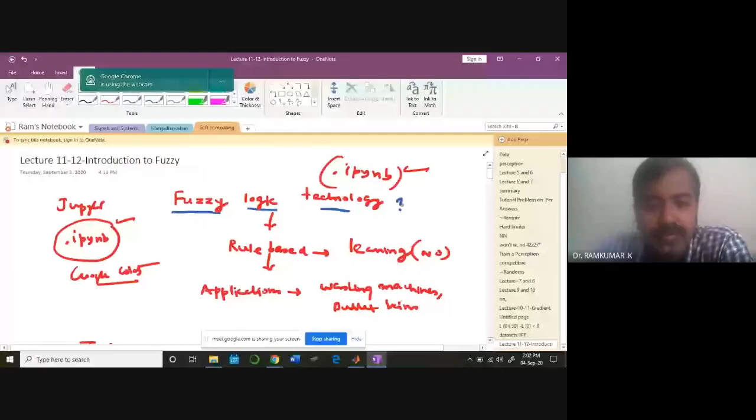So we started off with fuzzy logic in the last class. Okay. So what is your general understanding of fuzzy logic? Anyone? Arun Balaji, your general idea of fuzzy logic? Abhyashri, what have you understood by the term fuzzy logic? The last class I introduced you. Any idea?

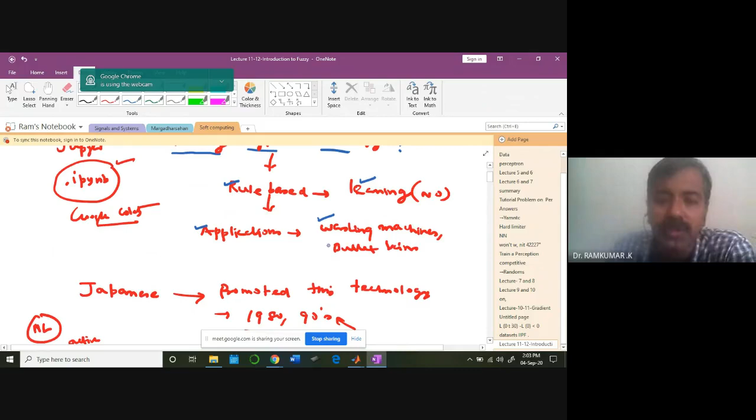So I initially mentioned it's basically a rule-based system, okay? And there is no scope for much learning there. Okay? And the applications range from consumer products like washing machines to bullet trains, we have a lot of applications. And as I already told you, the Japanese promoted this technology strongly.

Okay, any reason why the Japanese are interested in this technology? Any fair guess? Why are they so much interested in this technology? Any idea? Quite interesting to read that. Any fair guess? Why are the Japanese interested? Krishna?

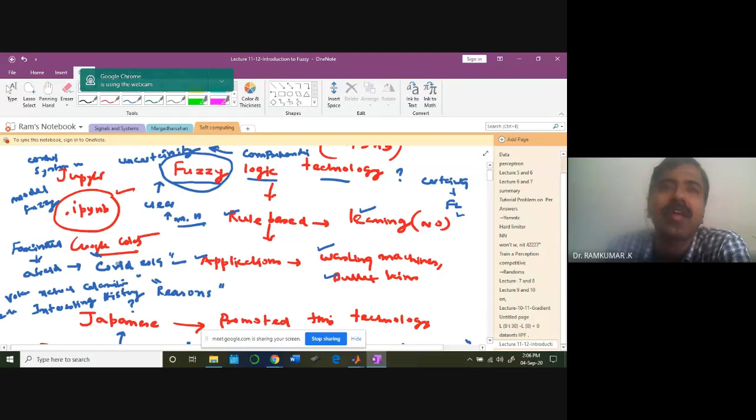This is a place where all kinds of natural calamities happen. They cannot predict this. They get tsunamis, volcanoes erupting, earthquakes. All kinds of natural calamities happen in Japan. So Japanese people were curious about handling these kinds of uncertainties. So they never believed in certain logics, something very clear, concrete: this is what's going to happen, either 0 or 1.

They were more interested in knowing why there is always scope for uncertainty. Why, when we are predicting something, suddenly something happens that changes the entire life. For example, a tsunami strikes. That will change your life forever. So that's why the Japanese, philosophically, were more interested in understanding fuzzy logic technology, and they came up with a lot of products.

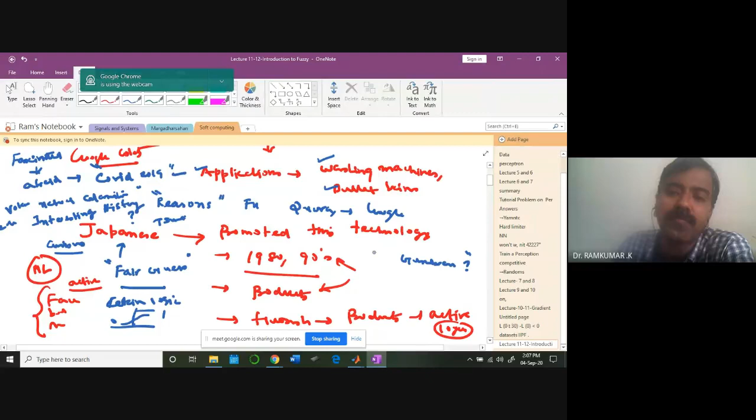It's quite interesting. You just type in Quora, or in Google: why are the Japanese interested in fuzzy logic technology? You will come to know a lot of reasons why they promoted this technology in the 1980s and 90s. But Europeans, particularly Germans, are not interested in this kind of technology because their mind is extremely black or white. They won't go for this kind of flexibility.

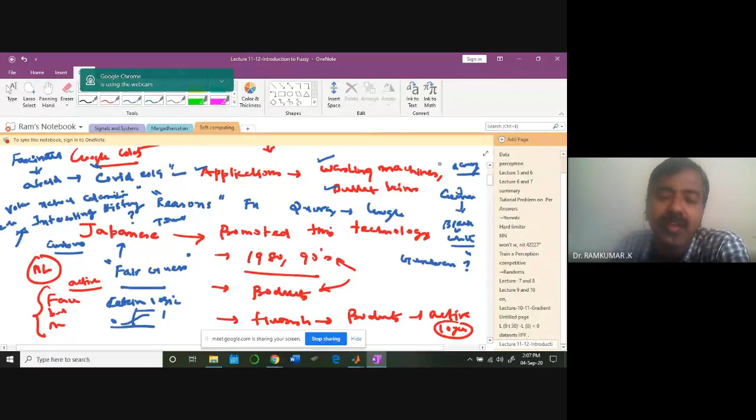I think the Indian mindset is more connected to the Japanese mindset than the German mindset. German technology, for example, is extremely accurate. They look for a lot of accuracy. The Japanese also, but they give room for some improvisation. So technology-wise, German and Japanese technology, you can study about this. Quality-wise, the Japanese won't compromise either. But the room for uncertainty is always there. They give that kind of room.

So now, if you move ahead and look at fuzzy logic technology, I said the logic is more concrete, clear, no ambiguity. But the fuzzy is more of not clear, something vague, confusion, not concrete, ambiguous. I hope you can recall that.

So in classical set theory, when you are going to place a person in the set tall, I am going to define it as greater than 6 feet. Persons who are 6 feet and above will be given a membership value of 1. Anybody less than 6 feet will be given a membership value of 0. 0 and 1. So this is the classical set theory we discussed, and then we diversified that particular set with the help of a fuzzy set.

I will be introducing it. In fact, Professor Zadeh, you just type in Google, you will know, by 1965 came up with a completely path-breaking mathematical idea called fuzzy set theory.

He in fact played a very key role. Before that also some work was going on, but Zadeh has made it somewhat clear, by 1965 he did that. So fuzzy set theory is just different from classical set theory. So we'll be learning about this.

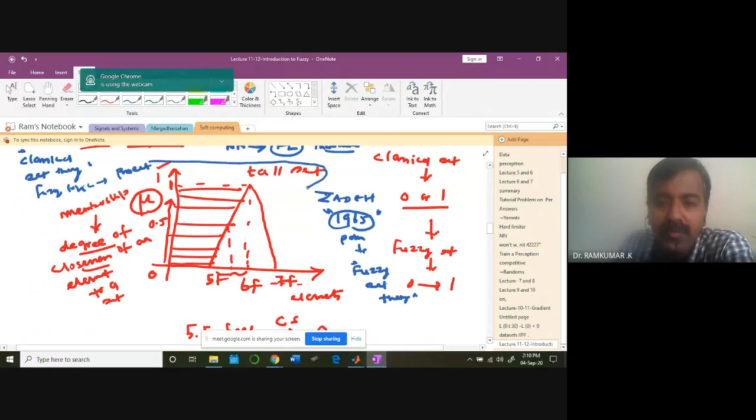So now, this idea. So can somebody tell me what this diagram, in fact, is about? Can you explain this diagram a bit? Anyone? Those who attended the last class. What does this diagram tell you? What does this graph in fact tell you? Anyone? Can give it a try?

Sir, 6 feet is the eligibility criteria kind of thing, sir. And we assign a range of values, and accordingly we give that membership value, sir. So understand this idea. This idea is crucial for understanding fuzzy logic. So it is called a membership, as Ananta Karthik mentioned. Memberships.

Membership in the last class I defined it to be equal to what? A degree of closeness. Once you understand this term clearly, fuzzy logic will be quite useful. Degree of closeness of an element in a set. Degree of closeness of an element to a particular set.

So for example, in the set tall, I have people with 6 feet, 6.1 feet, 6.2 feet, 5.9 feet, 4.5 feet. All those people are there in the set tall. Let us imagine I'm calling this set a fuzzy set. In that case, I'm going to assign membership values for all these guys. 4.5 feet, for example, I'll be giving him 0 membership, but a person with 5.9 will be given a different membership.

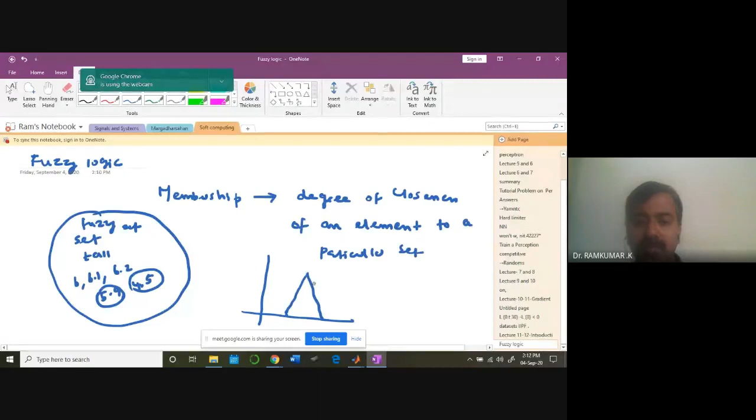So when I draw the membership function, something like this, a person with 6 feet, maybe I'll be giving him the full membership. And a person with 4.5 feet, I'll give 0. A person with 7 feet, I'll give some value, 0, in the set tall. But the same person will be given a much higher membership value in the set very tall. Likewise, 4.5 will also enjoy a different membership value in a set called short. That's the idea. I told you in the last class: different membership values, different sets.

So in the case of fuzzy sets, for tall, very tall, short, very short. Can you see it? All these are linguistic values. So I'm trying to convert the quantitative numbers into some kind of qualitative words like this. The quantitative numbers are 4.5, 6, 6.5. They are quantitative. But what I'm trying to do right now is convert them into some qualitative form. You understand that? This is a point I mentioned in the last class.

So we have different sets like this. Different sets we can create. And this form of conversion of quantitative crisp values, they call it. Crisp means something very clear. Crisp numbers, values into something like fuzzy values. It's called the fuzzification step. They call it fuzzification.

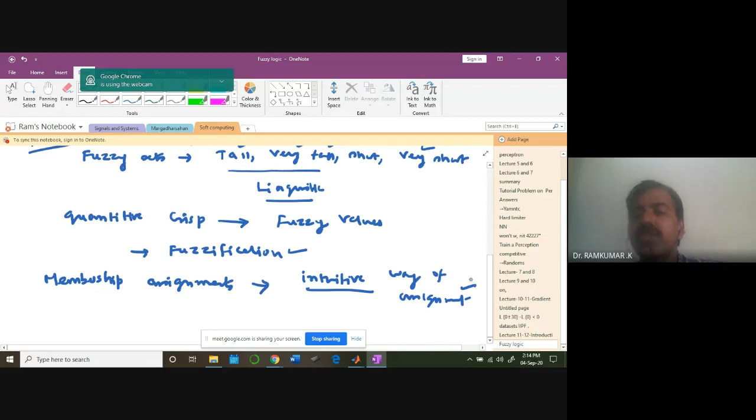The mathematical approach is also there, but we'll be learning some 3 or 4 methods. Okay, but membership assignment is one of the important criteria for fuzzy logic technology. And then I mentioned, can you recall the second step involved? Once the membership is assigned, that means what? Dividing your space, your quantitative space, into a number of fuzzy logic sets like this.

It may be a triangular membership function, something like this, or something like this. You can assign something. There are different membership values. Geometric shapes are there: triangular, trapezoidal. Then you have different things. Gaussian is there, the Gaussian way of assigning membership values. So you can assign membership values based on your problem.

So fuzzy logic is nowadays employed for classification also. Classification, clustering, as well as the key technology where over the years people have been heavily employing fuzzy logic is in control systems. We will see one example today of how we can employ it for control systems, with MATLAB. But the idea is clear: fuzzy logic can be applied for many of the ML tasks also.

ML can be applied for classification, clustering, you know that. So fuzzy logic can also be employed, but the element of learning is not there. But somehow we can bring in NN technology and couple it with fuzzy logic. NN will look after the learning part, and fuzzy logic will help you with some more concrete rules, with an element of fuzziness, uncertainty. So you can definitely handle uncertainty with fuzzy logic.

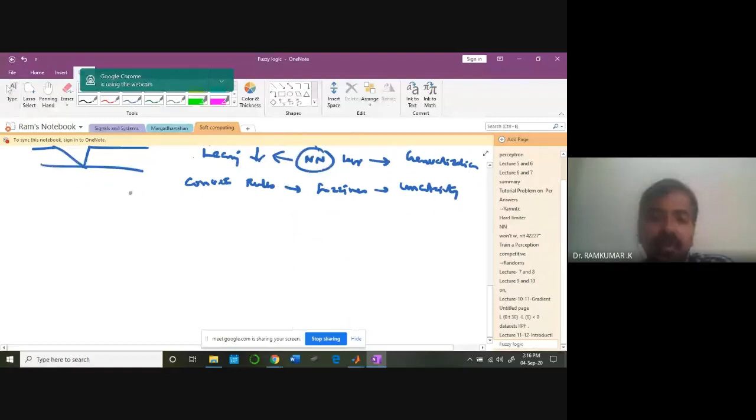No, sorry, I forgot, sir. Yeah. Anybody else? Purbaran? Varsha? Is Varsha there? Rupa Maitri, are you following the lectures? Yashwant Jalai Bharati, what is the generalization I talked about in the last class? Are you there? Sir, is generalization drawing that line, sir, according to the... One minute, Anudha. Yashwant, are you there? Did you understand the generalization concept from the last class? No?

See here, we are talking about something called generalization. The problem is there are some data here. So when I find a particular weight and bias which goes exactly through this line, this is called the overfitting problem in the neural networks domain. Once you overfit like this, when new data comes, somewhere here, the network may not be in a position to exactly predict the output.

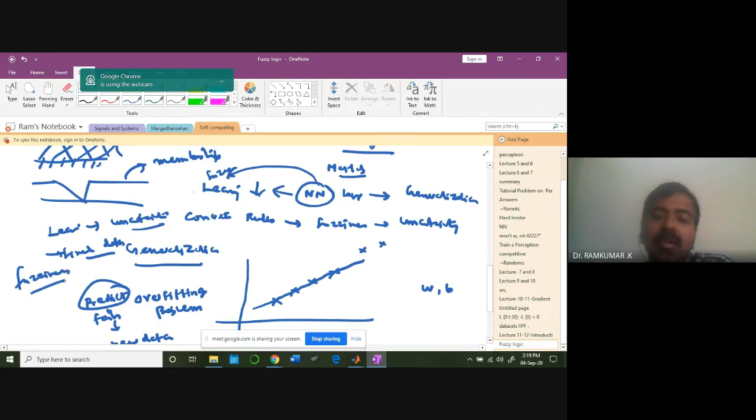Maybe you can think of how to combine hybrid technologies, how to combine neural networks with fuzzy logic. Is it possible to generate fuzzy logic membership functions with the neural network? Think about that. Now, in today's class, the focus is on how to implement fuzzy logic with one simple toy case. Imagine you are trying to control the temperature in a system.

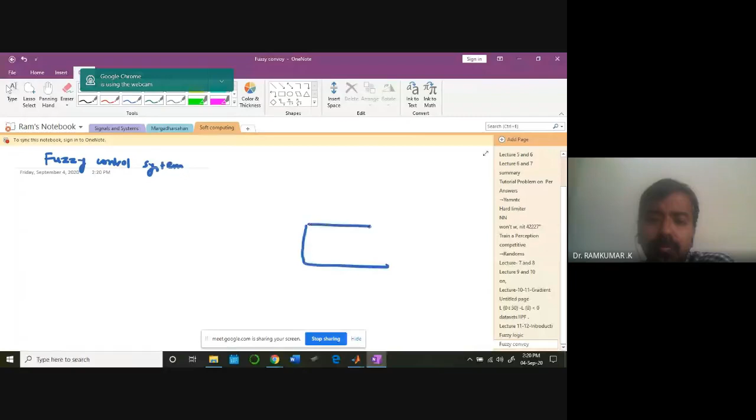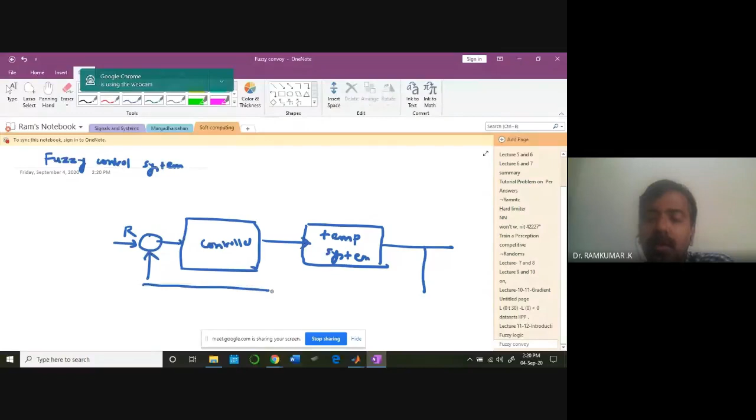You know very well that you need to measure the temperature, and the controllers are there to control it. You give the reference signal. This is a basic feedback loop diagram, most of you are quite comfortable with this. This is the temperature we are measuring, and normally we employ PID controllers.

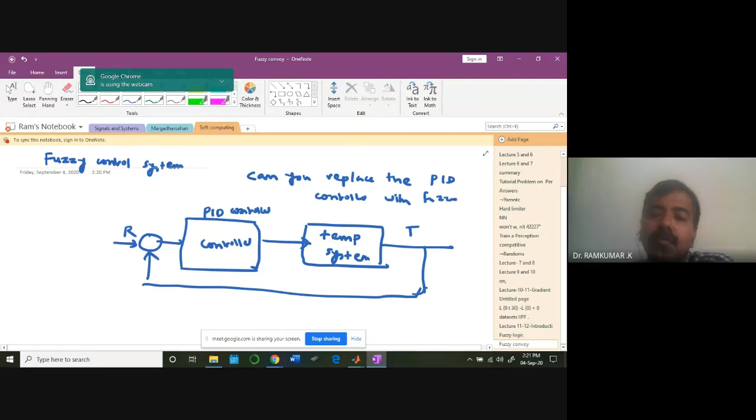Imagine the task given to you is more like this: can you replace the PID controller with fuzzy logic? If so, how? That's the question. How do you do it? Any fair guess? What do you do in order to come up with a fuzzy decision making logic?

Think for a minute. Come up with some ideas. I want to eliminate this controller with a decision making logic. So how do I go about it?

Any fair guess? So first we should determine the bandwidth kind of thing, sir. We should set a threshold and assign a plus and minus value, like we did before, as a membership band. Remember, you are talking about the membership band.

For what quantitative data will you do that? You qualify it, but there should be some quantitative numbers, so that you can apply membership. For example, in the case of a set, you have to define some sets. What kind of sets will you design for this problem? That depends on the application.

For this application, imagine you are trying to control the temperature in a place. Temperature — can you define it? Can you imagine that? Good, you are thinking, man. Good. Anybody else? Come up with some idea.

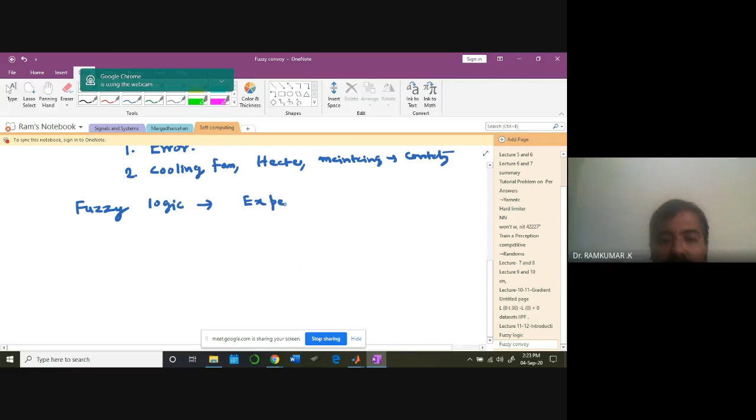So the input of the fuzzy logic can be something — you should imagine that very clearly. It's more like the fuzzy logic technology coming from a domain called expert systems, I told you. Expert systems means the knowledge base of an expert being converted into a rule base — that's a very powerful idea.

Many of the artificial intelligence, AI — in fact fuzzy logic comes under AI only, artificial intelligence. During the 1970s and all, there were a lot of AI-based products and tools, particularly in the field of medical diagnosis. What they wanted to do is convert the doctor's insights over a particular diagnosis into corresponding rules, so that the AI technology could be of help to the doctors.

You can take it as a kind of online medicine, wherein a person can start querying, and the machine will query that particular patient. When the person answers those queries, the machine, at some point, following a standard rule base developed with the help of the insights of doctors, can suggest some kind of medication, or some diagnosis can be done. It's a very interesting idea.

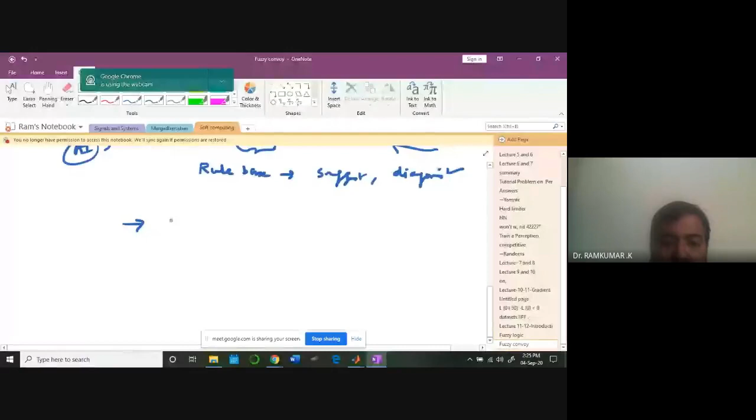During AI technologies in the 1970s, 80s, they heavily employed this kind of rule-based technology. There are tools like Lisp — just type it in Google, you can find this kind of thing. Then there is a tool called Mycin — these are all AI technologies heavily employed for this kind of application. In a similar manner, fuzzy logic is in fact an offshoot of this rule-based AI technology, but bringing in an element of uncertainty through the assignment of membership values.

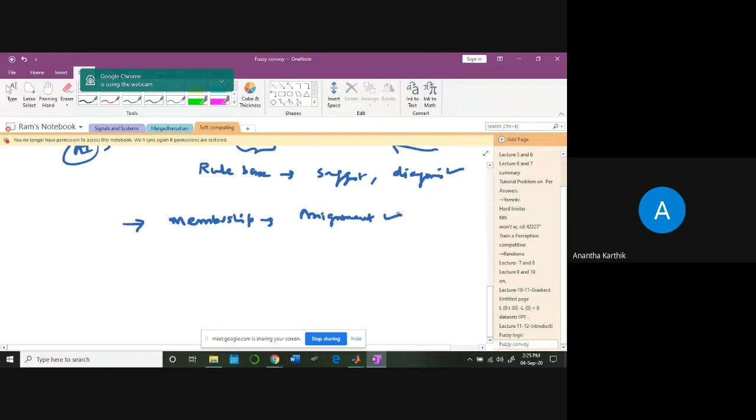Sir, a doubt, sir — yeah. You told us that in the temperature control example, you can replace a controller with fuzzy logic; we are going to discuss that. I have not discussed that. No sir, then what is the difference between a controller and a fuzzy logic decision? Are both the same, or is there any difference? No, that's different, that's why I'm telling you it's slightly different.

You can bring in — see, for example, normally the PID controllers that you work with in industries, they are linear controllers.

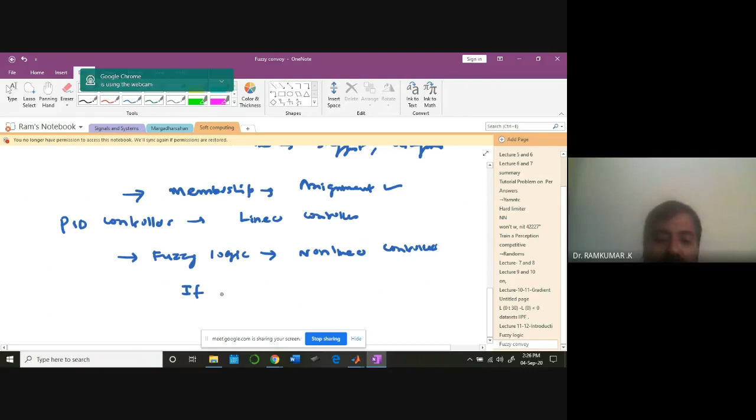You can bring in fuzzy logic, and thereby develop some non-linear controllers also. That's number one, because the rules can be anything. You need not follow a linear kind of rule. You can go in for if-then rules, which can be a kind of input-output mapping. This is the input, this is the output, and this mapping can be non-linear also. If-then rules basically mean if this condition comes, then this action has to be taken, and that action can be non-linear.

For our case, as Gurubaran has mentioned, the error is an input to the fuzzy logic. For every error, there is a corresponding controller output. Normally this mapping is linear when I say PID controllers, but you can create a non-linear mapping also with the help of fuzzy logic rules. In that way it is different. Number two, we are not talking about mathematical expressions.

Mathematical expressions are ruled out here. Why am I saying mathematical expressions? The controller output for a PID controller, you know very well: Kp times E, plus integral, plus dE by dt, with Kd, Ki values - Kp, Ki, Kd values.

Sorry sir, I lost my connection. Could you repeat, sir?

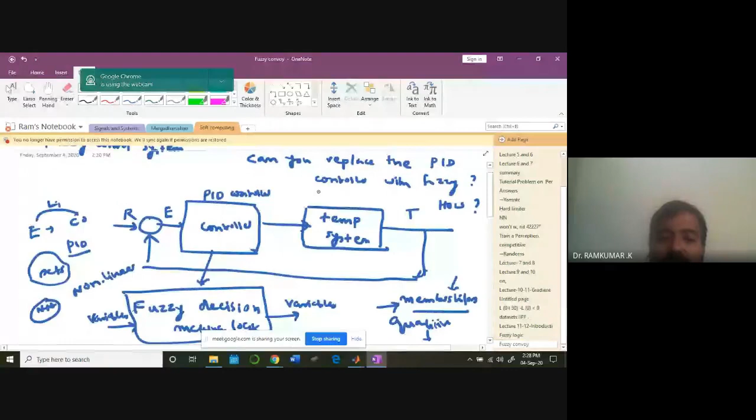Fine, look at this case. In the case of fuzzy logic versus PID controllers - PID controllers are linear, in the sense that the input-output mapping is linear. Error is the input, controller output is the output, and this mapping is linear. So what I am saying is, with the help of fuzzy logic rule base, you can create a non-linear mapping also. That's something I am telling you first, so the controller can be a non-linear controller.

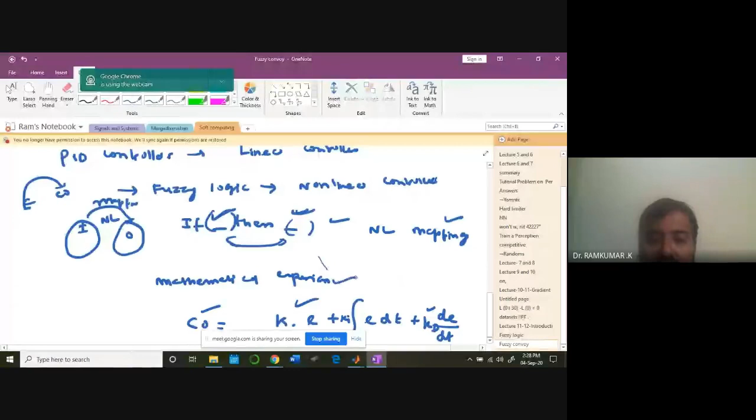Number two, all mathematical expressions are ruled out. In the case of PID controllers, you need to work with algorithms. How do you work out this algorithm in a computer? You know that very well - you choose the values of E of k, E of k minus 1, E of k minus 2, store them, and add all those values. Then you get the integration factor, and E of k minus E of k minus 1 divided by delta t gives you the d by dt term, with error as E of n. Various instances of error are collected, and you compute the controller output based on Kp, Ki, and Kd values. That's normally how the PID controller works. But all these are ruled out here.

So we are not using any kind of mathematical expressions. In the case of fuzzy decision-making logic, we are simply writing some rules - if-then kind of rules. Moreover, the key point is you are converting the ideas collected from an expert.

For example, a boiler operator, a control systems operator, working in a particular boiler system for around 25 years, knows that every time the temperature reaches a particular point, and comes down with a lot of oscillations, he will increase some gain. He will say 'I will open the steam valve more' for one condition, or 'I will decrease the valve' or 'I will close the valve', or 'I will gradually increase the valve.' So he tells you things in a linguistic, qualitative manner - some kind of inputs you will be getting.

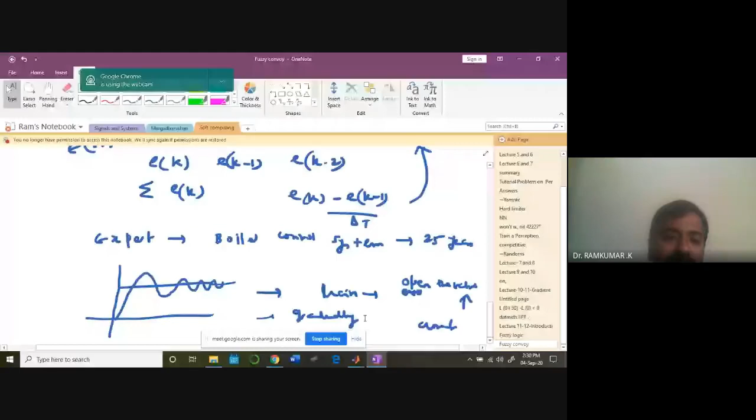For example, when he is manually trying to control some level in the tank.

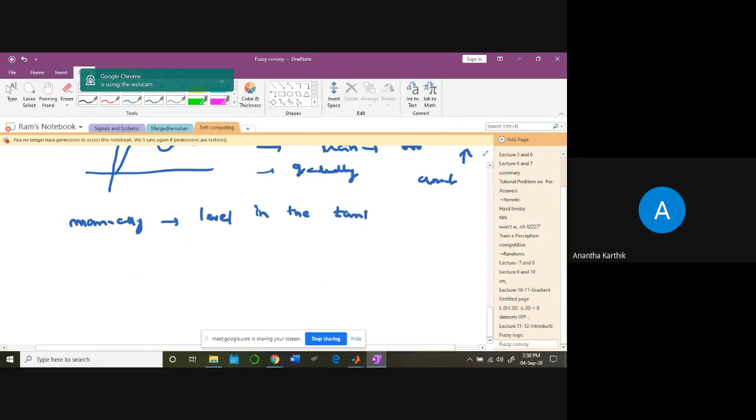I think one of you has put something on. Karthik, can you close that down? Some noise I'm getting from you. Fine, I'll mute it.

So manually, say, controlling the level in the tank - how do you do it? For example, manually you want to control the level, how do you do it? So you look at the level.

Okay, for a steady flow rate, the level starts increasing. There is a valve here, so a person will be standing here observing the level, whether it is increasing or decreasing, and at what rate.

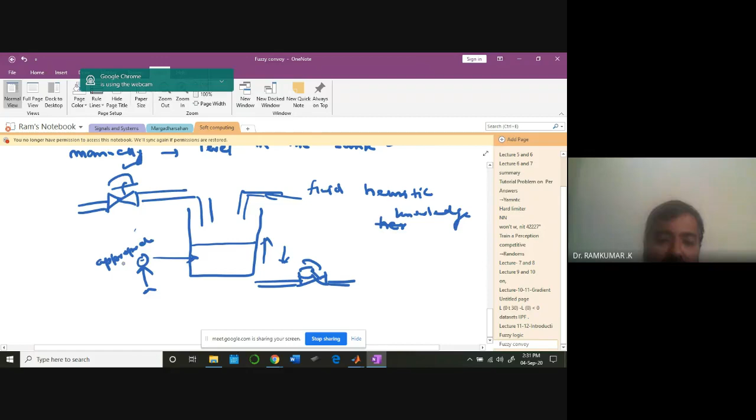Based on that he'll take appropriate corrective actions, either opening this valve or that valve. These are all something called heuristic knowledge in the AI domain. This is based on his sense perception and inference, and he will make decisions on the spot.

So this knowledge can be of use to us. You have to collect this knowledge. So how do you do it when it comes to PID controllers? That is something we need to imagine.

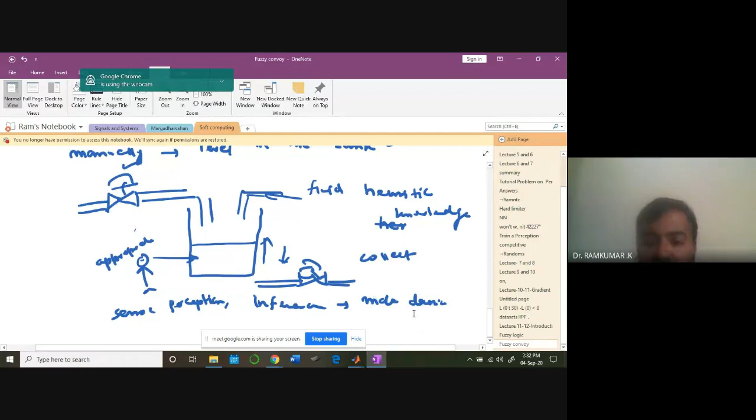I want to replace my PID controller with the help of a fuzzy logic controller. First, I need to know, for the given system, in order to control effectively, what I need to do with the error. With respect to whether the error is increasing or decreasing, I need to take some immediate corrective actions, either opening a valve, or a heater, or cooler, or maintain previous actions. All those I need to think.

That's where the idea of heuristic knowledge comes, and you can normally develop this by doing some kind of simulations. You take your system mathematically, like a temperature system, give different inputs, and study how the system behaves.

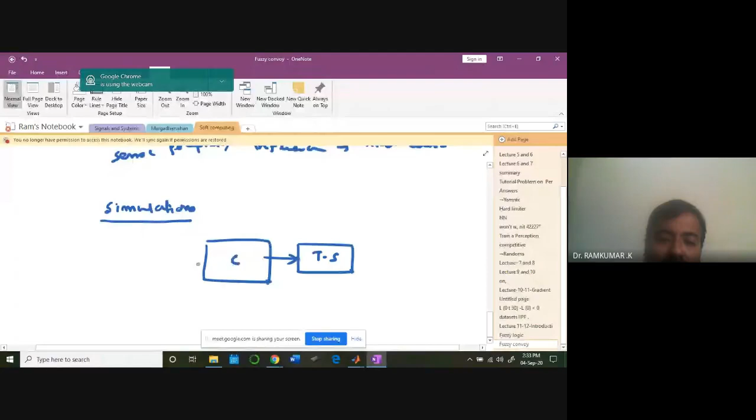For example, I can tune my system using a conventional PID controller, and study how the error changes with respect to time, and what corrective control actions are taken by the PID.

Then you try to write a rule based on that. Every time the error has an increasing slope, the corrective control action has a decreasing slope, which may be a cooling action. If the corrective action is increasing, maybe it's a heater action. You need to think in this manner, and in that way you can deduce a rule.

Then you can work out a kind of strategy, collecting all the error ranges. For my system, I may decide the error can be positive error, zero error, or negative error. All these three are linguistically defined by me, applying my intuitive power in defining it. So the error range I am fixing.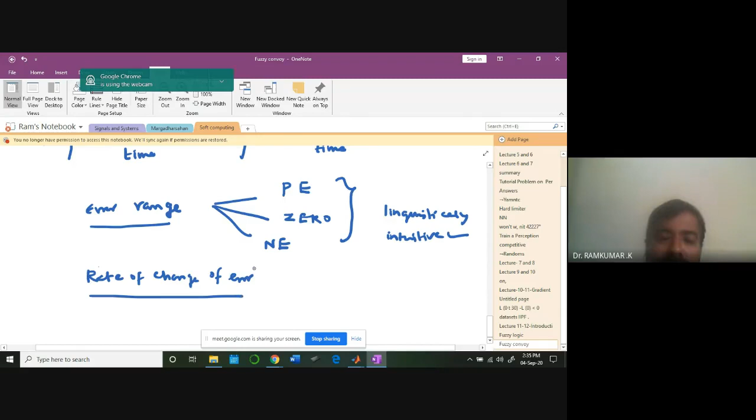Then I can add more variables, something like rate of change of error, meaning how fast the error is changing, the slope of it. The slope can be either positive, or constant, zero, or a negative slope. I can fix this.

There is no hard and fast rule to fix the number of ranges to only 3. You can go for 13 ranges by assigning appropriate linguistic terms. For example, positive error can be divided into positive very large, positive large, positive medium, positive small, and so on. The more you divide, the more precision you get, though it becomes computationally costly.

The rate of change of error also I can divide like this. And then the controller output: what kind of controller output am I seeing? Based on that I can decide it may be a cooling action, divided into cooling medium, cooling large, and so on, or heating action, or otherwise no action where the previous action continues. When the error is zero, for example, I need not disturb the system.

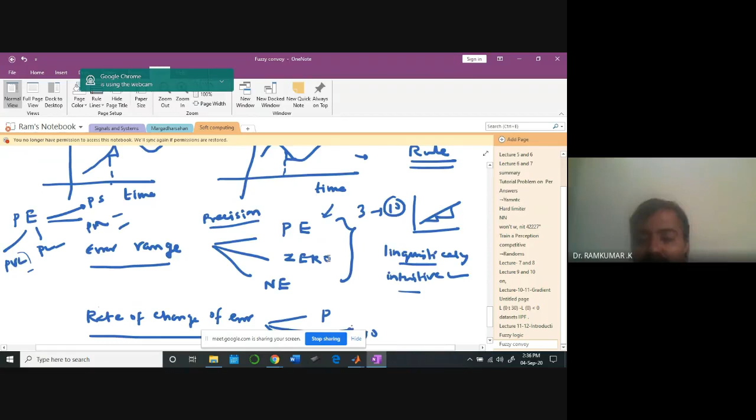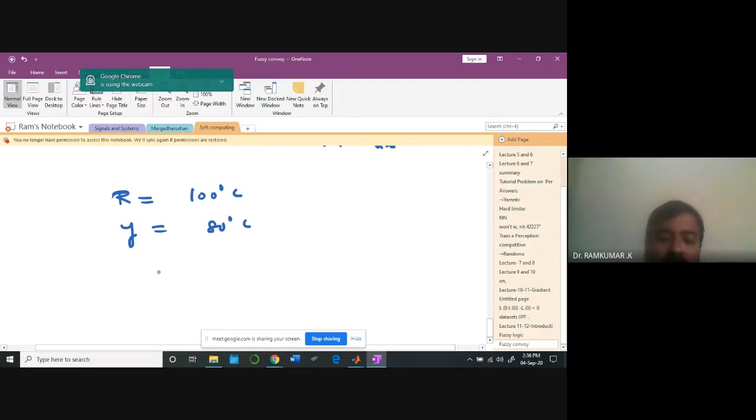Okay, so for our case, for example, the temperature I want is around 100 degrees centigrade; that is the reference. The measured value is 80 degrees centigrade. So then you know how to compute the error. The error is going to be equal to R minus Y. So 100 minus 80, you are going to get a positive, in fact large, error here.

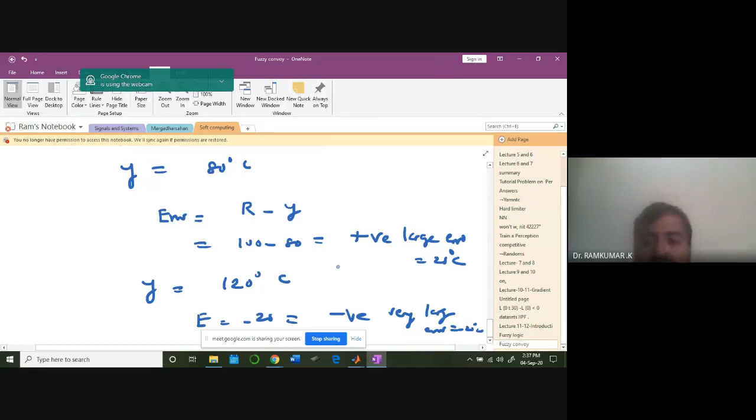In this case, a 20 degree difference. In the same manner, you can imagine when the measured value Y is equal to 120 degrees. Then the error is what? Minus 20 degrees, a very large negative error. So in that case, what control action will you be imagining in your mind? Cooling. Immediately you will apply cooling, no doubt. High cooling you will immediately apply.

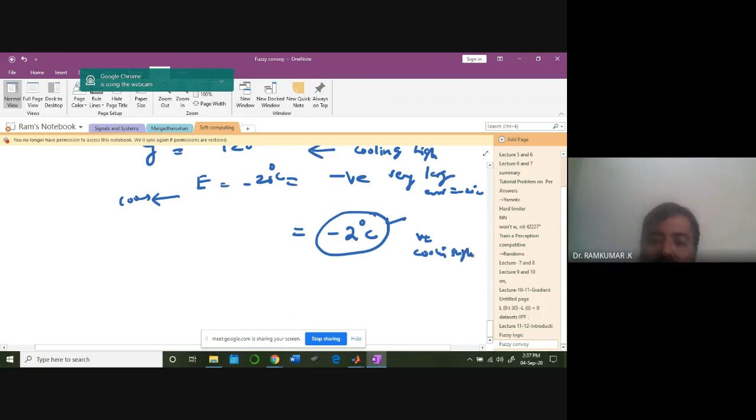But at the same time, you will not be applying high cooling for an error of -2 degrees centigrade. -20 degrees is too far away from 100, so you need to drastically reduce your temperature. But for 2 degrees centigrade, you may not immediately apply a very high cooling value. Maybe you will apply slight cooling, or you may think of maintaining the previous action.

At the same time, you will be monitoring the rate of change of error also. You understand what I'm saying? If the rate of change of error is decreasing, the error is coming down. It is decreasing fast on the curve. Then you'll see the slope and you'll think that in a matter of another few seconds, the temperature will reach the reference point, because the error is already decreasing drastically.

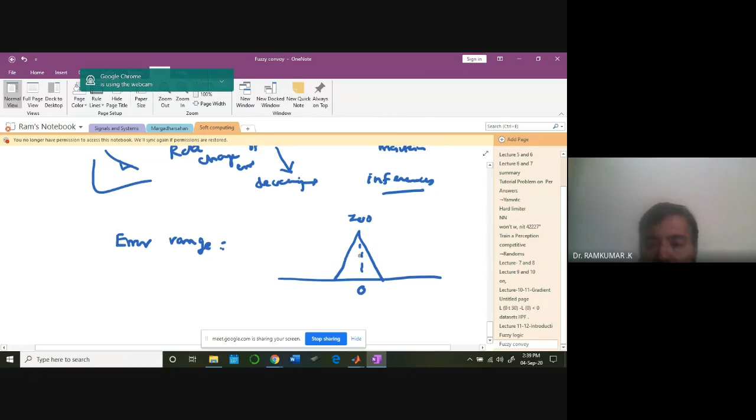So you can make some corrective inferences based on the kind of data you have. It is something you have to think about intuitively: how we are going to frame the rules. So -2 degrees is like that. What I'm trying to convey to you is, you take the error range and then fix your membership values. Anything near 0, we call this set the zero set. See, I am accommodating even -1 to 1 in my zero set. That's the difference between a classical set and a fuzzy set.

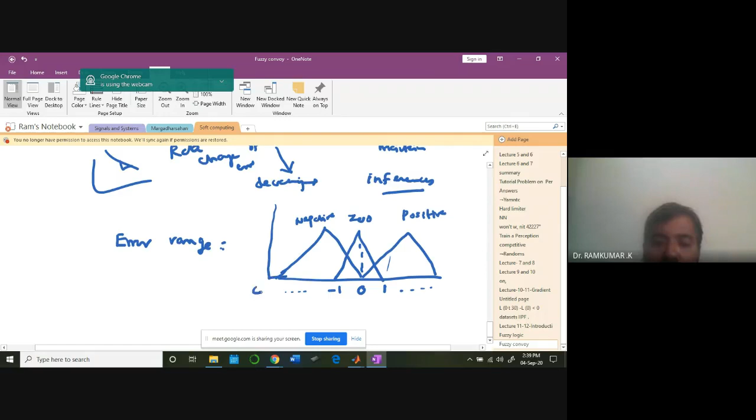Then I will go for one more set. This is a positive error; this range is positive. Then one more set; I'll call this range negative. Every element within these sets has some membership value, ranging between 0 and 1. So this is my first step: I will identify the variables. The variables for my case are error and rate of error, and the third one is the controller output.

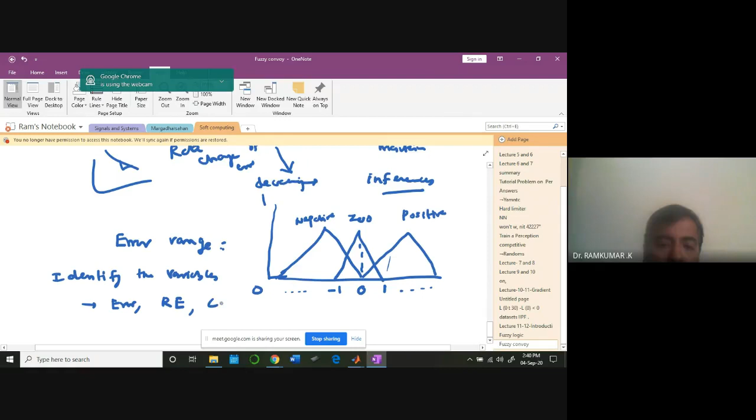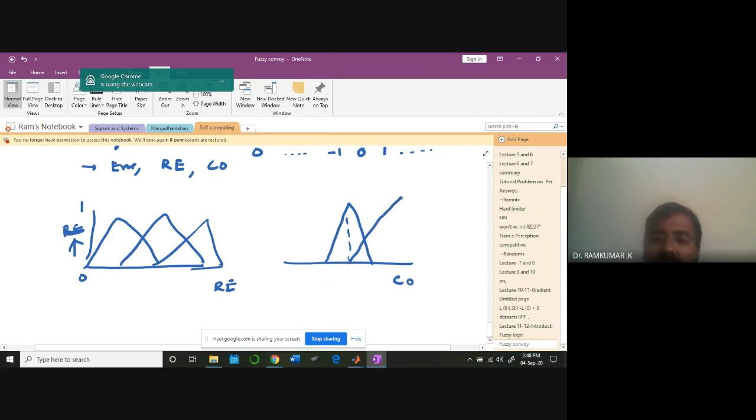For all these variables, I will assign membership. Once I assign it for error, I will do it for rate of error also, with membership values between 0 and 1. In the same manner I will do it for the controller output. This range I will call heating action, this I will call no action, and this range I will call cooling action. When the error goes negative, I will take cooling action. When the error goes positive, I will take heating action. I will fix my ranges accordingly.

Controller output: these are the 3 signals associated with the controller output. Signals related to the heater, signals related to no action, and signals related to cooling action, like the cooling fan being switched on. Based on that, I will fix the values. The cooling action can vary; it can be here, full cooling action here. So now, having done this, I'm ready with my fuzzy inference mechanism. I have 2 input variables and 1 output variable.

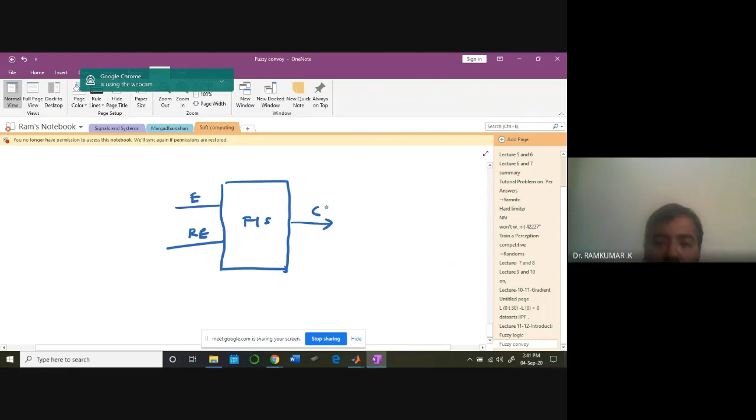Okay, error, rate error. Based on this, I'm going to decide upon something. What is that? Controller output. So then what I will do, I will write my rule base. If my error is negative large, then controller output is cooling high. Okay, you understand? So I'll be writing different kinds of rules like this.

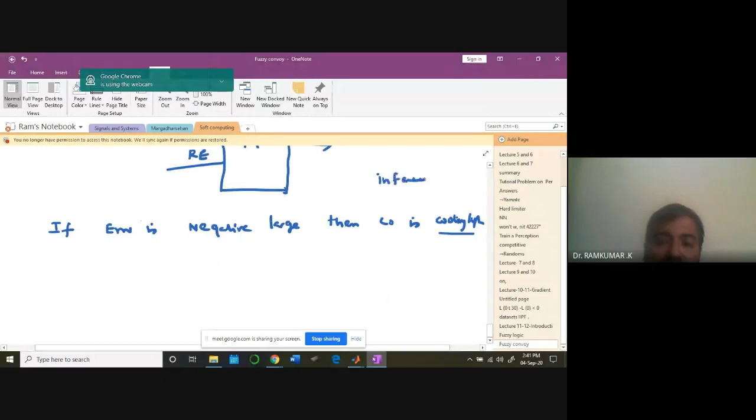Okay, based on the inference mechanism. We have to learn about inference mechanism. Later on we'll learn. But fuzzy inferences are very powerful. Okay, fuzzy inference systems. So if error is positive large, then control action is heating high. Then you have to couple. Okay, so we're not using only one variable. We have to use two variables.

If error is negative large and rate error is also negative large, then the cooling action is somewhat cooling medium, because error is coming down drastically. Okay, rate error is coming down drastically. So in that case, I know that it's going to come down to that desired point after some time. So naturally, I don't want to waste much of the control energy there. Cooling high may waste some amount of energy.

So I'm going for a cooling medium. Okay, cooling medium means medium level cooling. Okay, I can write my rule accordingly. Okay, cooling medium. But I need to define these memberships. Remember that. Okay, I need to define this membership somehow or other. For example, the same point may be in two different values also.

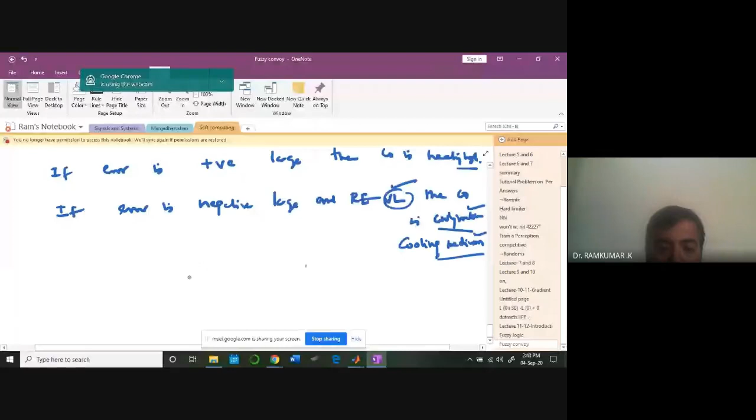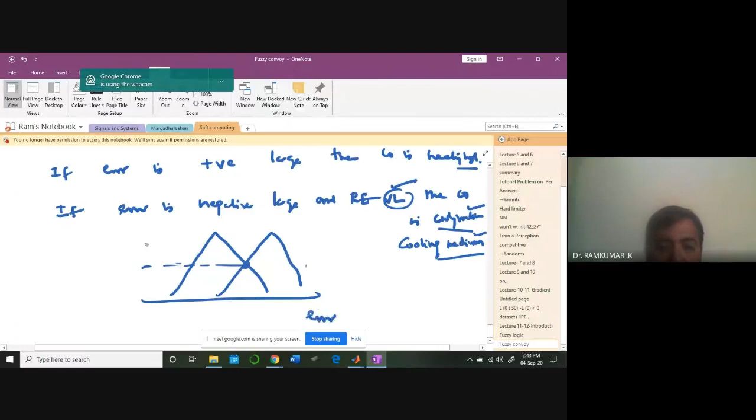For example, this error, there is an intersection point here. This error can have this value, this is the error. Error and membership. Membership mu they call it, 0 to 1. So this point is having a value in both the zero error or positive error. It is having both the values. It's an intersection point. Okay, so it's going to enjoy both the membership values. In that case, how are we going to combine these values?

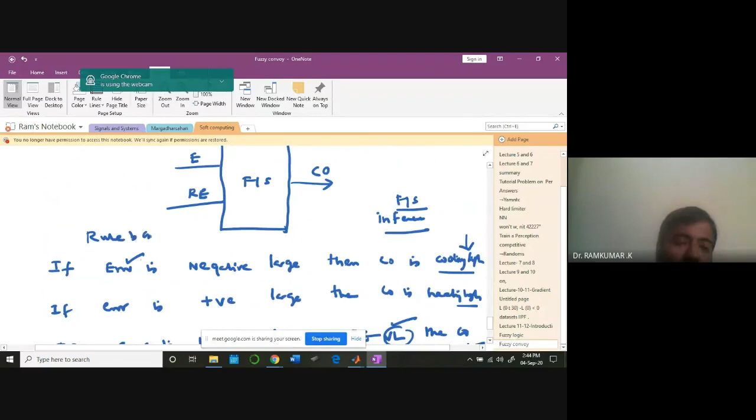All this is simple learning. Under the fuzzy inference systems, we will be talking about how much area we need to take. Okay, all these we need to think. But the key idea is this: we identify the variables for the decision-making process, then we assign membership values, and then we write the rule base, the fuzzy inference systems rule base. Then we will go for something called defuzzification. Because once having done these operations, we need to again defuzzify. Defuzzification is the third step.

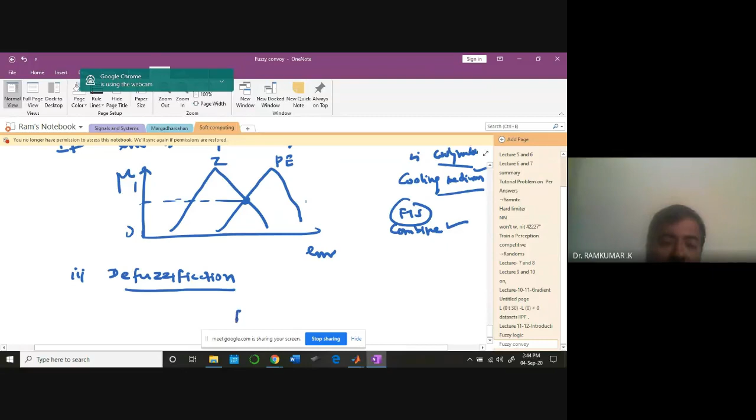In the defuzzification stage, you will be again converting fuzzy values into crisp values, numbers, quantitative. So, for example, fuzzy value, can you give an example? Cooling high. It's not concrete. It's not crisp. It's very vague or something very uncertain. But we need to get some crisp values back in order to operate the actuators in the real world.

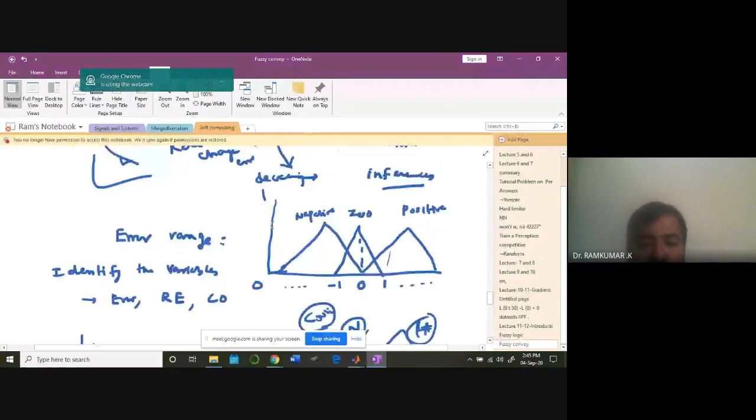So defuzzification is an important strategy in real-time applications. Because unless you defuzzify, you cannot operate a valve. You cannot give an instruction to the control valve saying open slowly. That is not going to work. How much pressure do you need to apply in order to open, 4 psi, 3 psi? Numbers need to be given in order to operate the actuators.

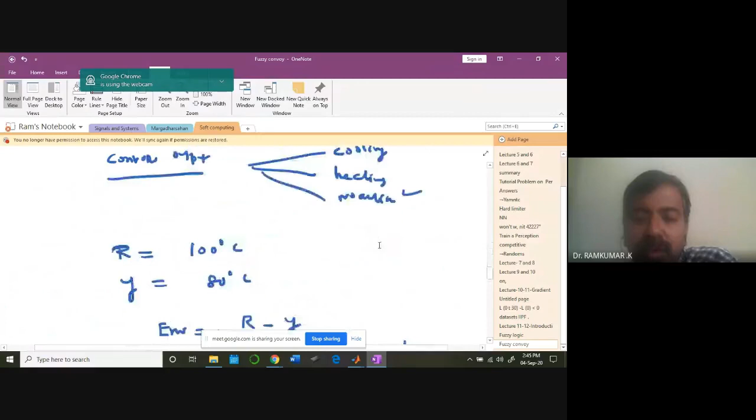The actuator is here. It may be a fan or a cooling fan or a pump, anything. So you need to convert the fuzzy logic output into such a kind of thing. So that is important. Now look at this case. There is an excellent fuzzy logic toolbox in MATLAB. You can easily learn that. For example, temperature control in a shower. Simply you can type this and run this.

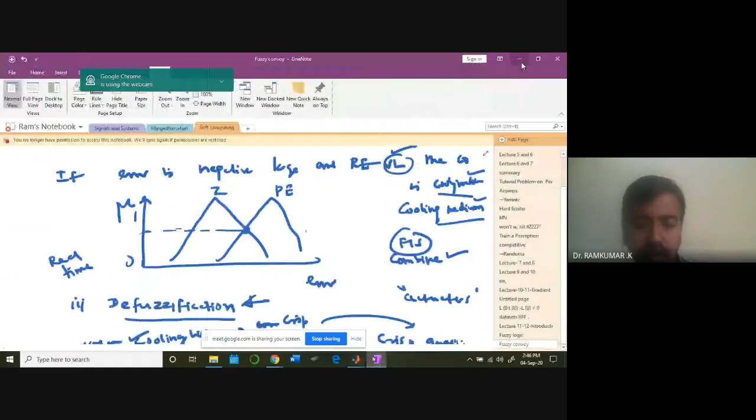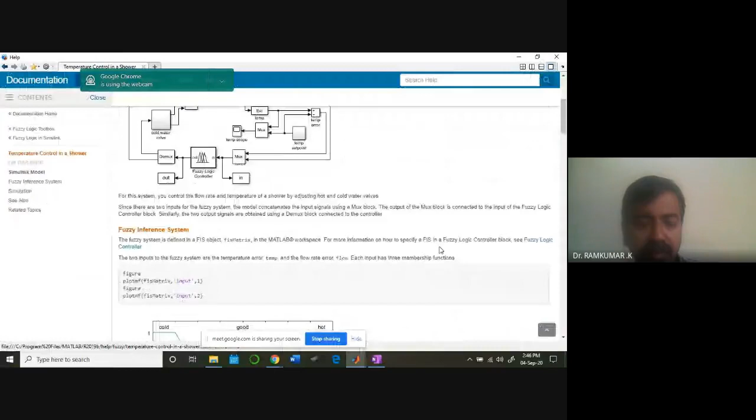We'll be seeing a fuzzy inference based graphical user interface. You'll see immediately. Okay, just a minute. Let it open. You can read this. See here, as I told you earlier, there is something called cold, good, hot. What are these? The idea is very clear.

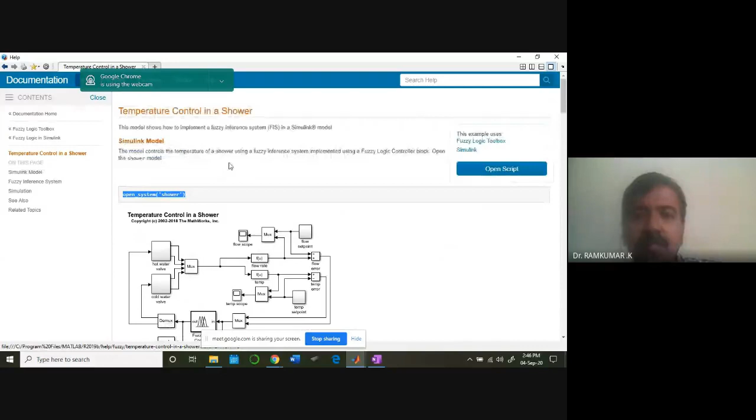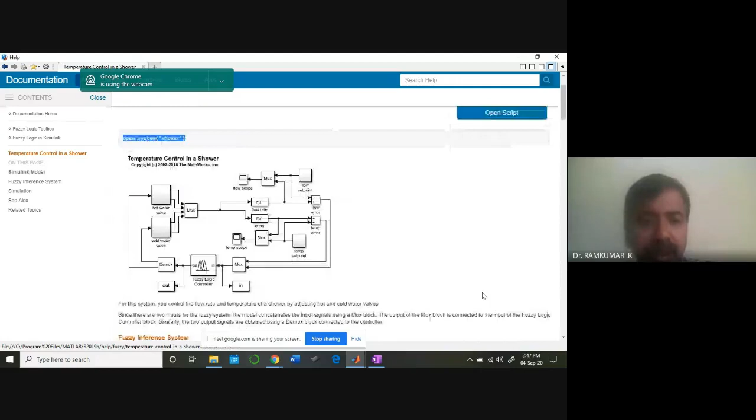It models the temperature of a shower, what you have in the bathroom. You can either open the cold water valve or the hot water valve. How are we going to mix it in order to get the desired temperature? That's the idea. It can be cold, the temperature is good for you, or it is hot; degree of membership is assigned for temperature. Then flow. The flow is soft, good, hard.

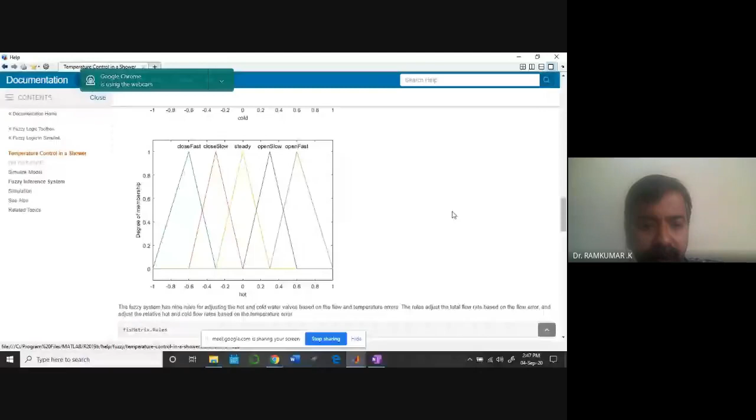Then they write the rule base here. If the temperature is cold and the flow is soft, then open slow, hot, open fast. This is the kind of rules they are following. So once you write the rules, then you can get the results. It's taking too much time to open.

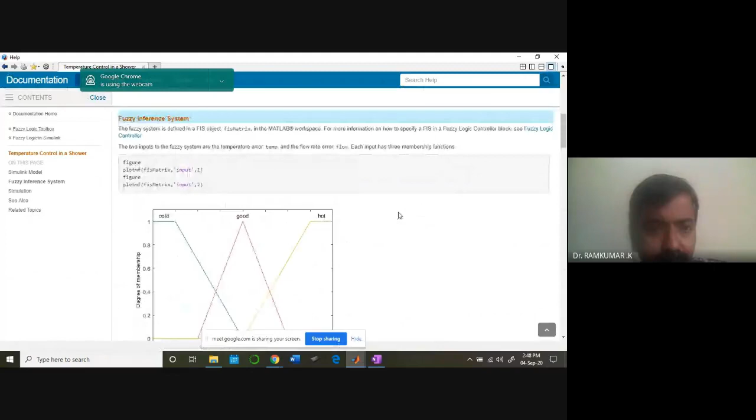So that's why. So you can open this fuzzy logic toolbox and the documentation, and you can read that documentation also. So here you get some nice definitions and all the MATLAB documentation. So what is fuzzy logic? If you click that, you'll get some more information. So you can see it's a good example he has explained.

So for example, it's a very classic case. In the real world scenario, you will not be working with this kind of very accurate information. A 1500 kg mass is approaching your head at 45.3 meters per second. What do you do in the real world? You simply say look out. That's all. So that's the difference. Okay. Significance is this: fuzzy logic is convenient to map an input space to an output space. You can read this. It's nice material.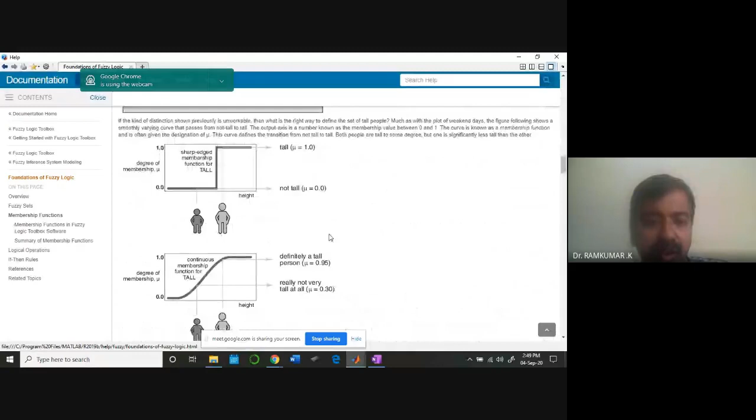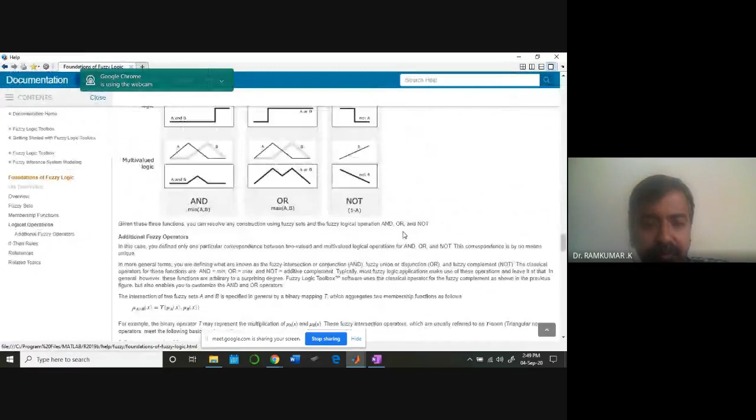Why do you use fuzzy logic? What's the idea behind it? Foundations of fuzzy logic. Okay. With some examples they have explained. For example, the example I took the other day is tall. Definitely tall, really not very tall. Exact example I gave. So different kinds of membership functions are there. Okay. The Simulink is opening, it takes 5 minutes. Okay. So various logical operations can be done. We'll learn all this later on, but just try to get a feel of it.

So rule base, if you look at the rule base, if X is A, then Y is B. So that's the kind of rule I'm talking about. Antecedent, they call it, and consequent. The logics, in fact, they use it. Okay, if service is excellent or food is delicious, then tip equals generous. Understand? It's a good example.

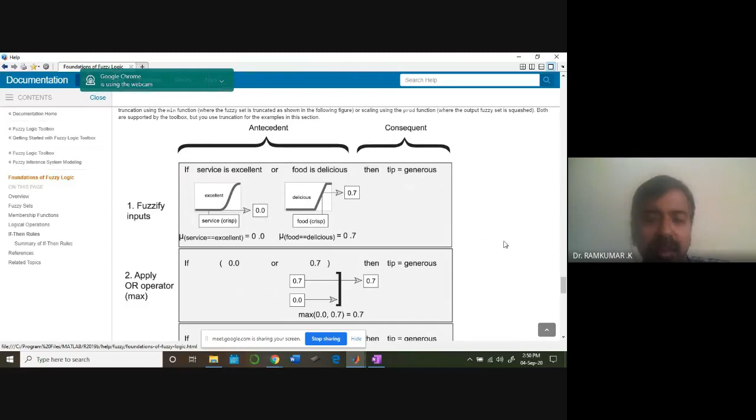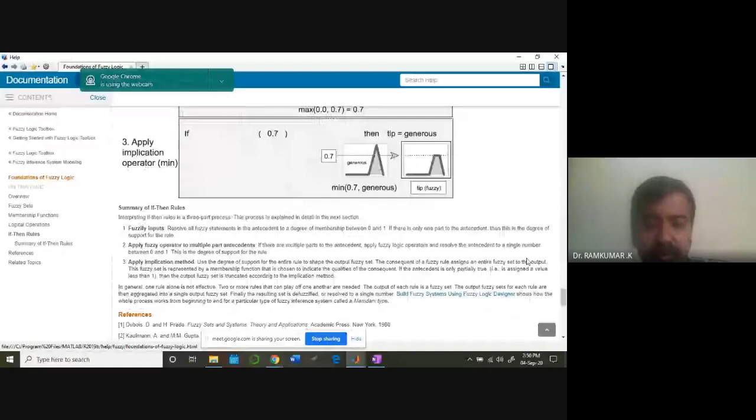You're going to a hotel, and you want to tip somebody. When will you tip? Service is excellent, food is delicious. Either one of them happens. If both are there, then you'll give. Okay, so 0.0 or 0.7, then tip equals generous. Food is delicious, so you are providing it. Okay, so that's it. This is about fuzzy logic technology.

Okay, so we'll go back to the MATLAB environment, and I think it's open. Yeah, it's our example. So you can see here clearly, this is a fuzzy logic controller I'm talking about, to replace the conventional PID controllers. Okay, so here is the mathematical model for the shower example. It may be two actions: flow rate and temperature adjustment. Flow error, temperature error. The hot water valve and cold water valve are adjusted. Based on that, you get different flow rates. So this is a mathematical model.

Okay, and you adjust the cold water valve and hot water valve so that your temperature and the flow will be maintained. That's the idea. So you get two inputs. Temperature is what we are controlling, flow is not controlling, but you are taking that information also as an input to your fuzzy logic. So look at this, flow error is also taken. So you give two inputs to your fuzzy logic. Okay, so run the thing, you will get some idea how it is running. Temperature controlling the shower. Running.

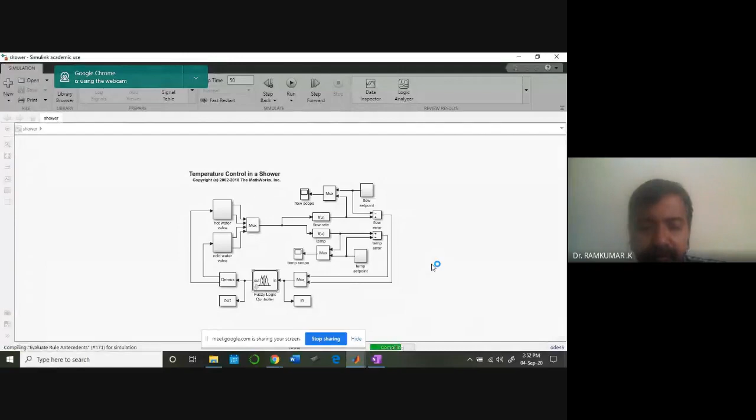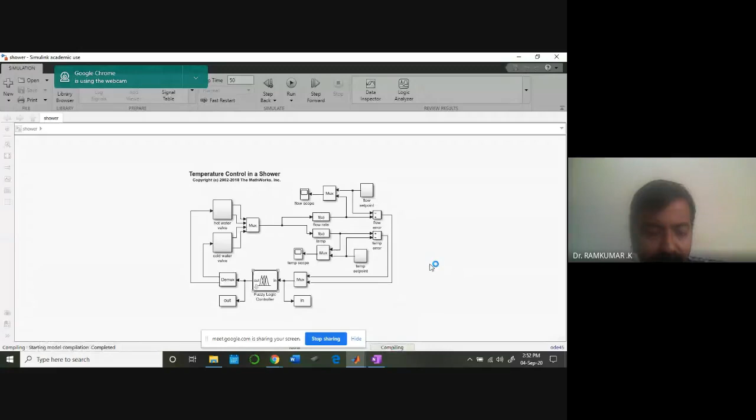You can run this afterwards, see what kind of results you are getting. And then one thing you can do is double click this fuzzy logic controller and you get it open. And you can see the different rules and all those things inside, how they have framed the rules, everything, the data will be there, and we can go through that. Okay, let's take 2 more minutes. Simulation is running. Yeah, compilation completed. I'm initializing it.

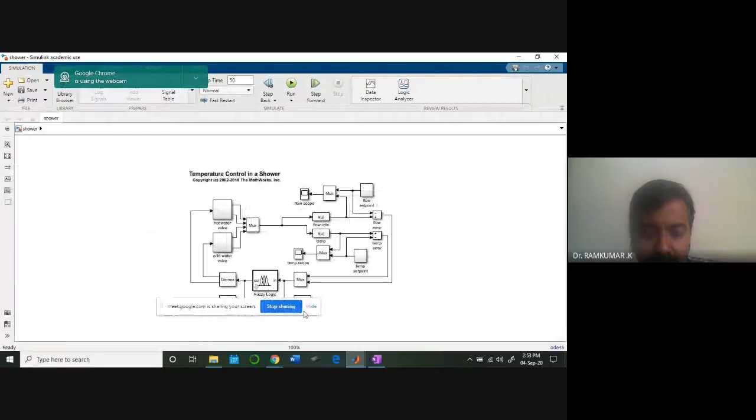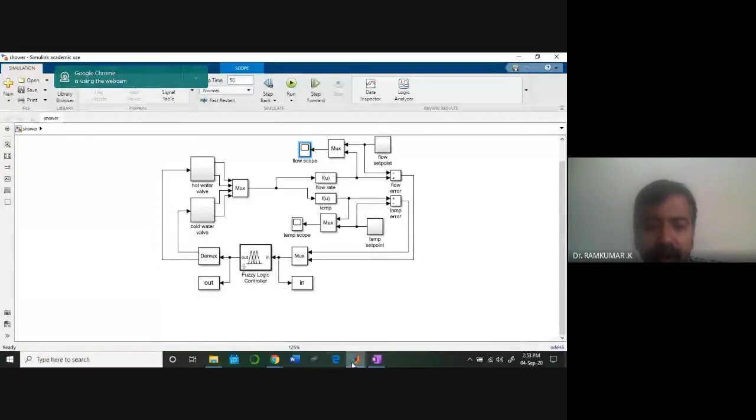In order to design this fuzzy logic controller, you have to understand this. You need to just type in MATLAB fuzzy.

Okay, if you open up this interface, nice GUI. Can you see it clearly? Now, if you look at this, the untitled Mamdani is there. That's your fuzzy inference decision making, fuzzy control. So there are some inputs here, there are some outputs here. There is some provision for edit here. Save, edit. If you click that edit, you can add variable.

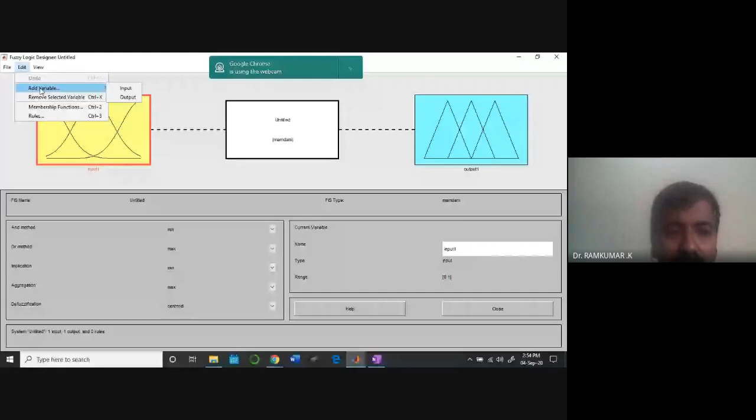For example, in our case, what are the 2 variables I mentioned? Controller error, and rate of change error. So I can add that. Add variable input. If I click that, I'll get this graph. Okay, it's nice. So now what is the output? I have only one output. All right. You can remove the selected variable also.

I can assign membership value. So now I'm going to assign membership. Click on that first input, then edit, then assign membership functions. The membership function is going to get opened up like this. Now I'm going to operate on the first input variable. So I'm going to define that one as something like error. You can do that.

Then I can assign different kinds of membership functions there. Trapezoidal, Gaussian, all kinds of membership values. Then you define the ranges, the range equal 0 to 1. All those values you can design, the parameters, how these values can be adjusted. I'm going to click on this, and I don't want this kind of a transfer function. I would like to have a triangle membership function with a range between 0 to 0.4.

Okay, this is the first one. So it starts from 0, mid value is 0.2, and maybe 0.4 I give. If I give that, it will get changed. See, it is changed now. So I modified it. So you can modify these membership values based on your problem statement.

So likewise, you can assign membership values for the other case also, the rate of change error. Rate error. You can define the corresponding membership, rate error, like this. If you look at this, immediately I'll get rate error as the second input. So you can define all those things. Maybe I have to go back.

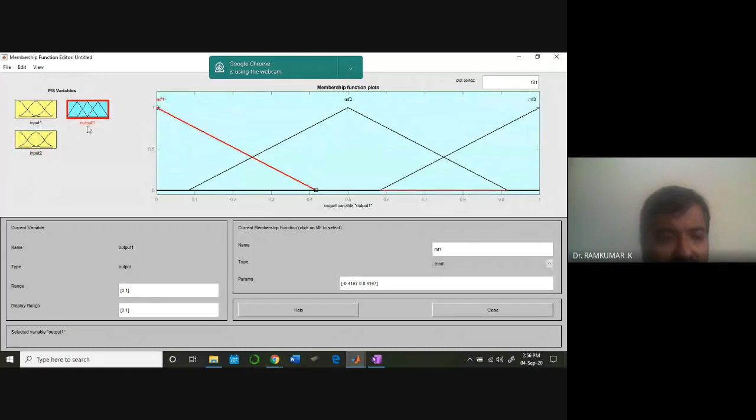So look at this. Once you're done with this, you can add membership functions, and you can remove selected membership. For example, I don't want this membership. I can click that and remove it. It will be removed immediately. So I can add different things. Once you have assigned membership values for all the 3 variables, you can view your rules. If you go there, the rules viewer will be there. Here you have to substitute the values for the rules. Input, outputs.

You can add membership function. Okay. So we will see that. In the next class I will show you some demo also, if you want. It's quite easy to work with, it's not difficult. Only thing, you need to have a MATLAB environment. If it is feasible from your end to get that, we can work with that.

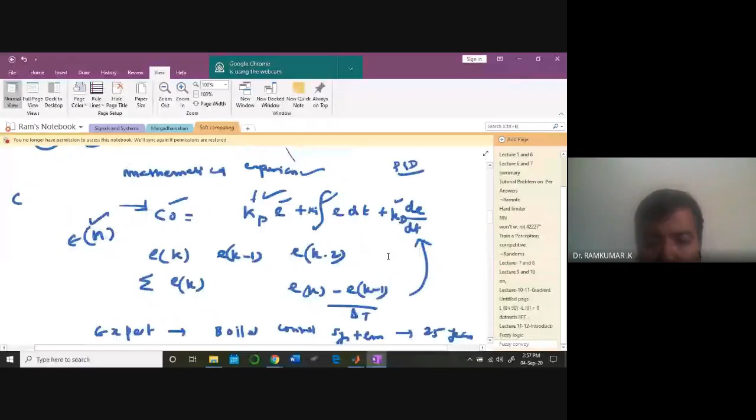Okay, any doubts so far? Anything you want to discuss? View here is not open. Maybe that's it.

So I can add rules here. Yeah, here is rules. For example, if input 1 is error MF3, input 2 is MF3, then the control output can be MF3. So I can assign these values. Then I can do the AND operation and then add rule. If I add the rule, it will automatically come in. See, the rule is being added.

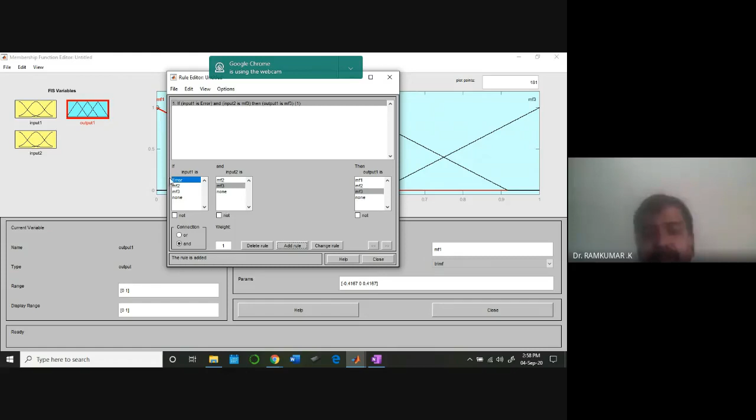So I can generate the combinations of rules. For example, for a 2 input case with 3 membership functions, I can generate up to 9 rules easily. Different combinations. So that way I can build my rules. Once you're done with that, you can go for different rules. Then you can see the rule viewer also, how the surface of the rules looks. But right now don't bother about all this. Gradually you try to get into this.

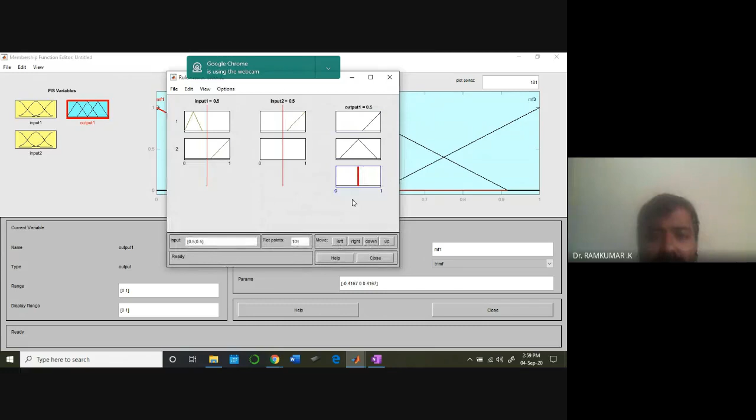You can change rule, you can add rule, you can delete rule, everything you can do. The rule viewer is there also. So you can get a feel of what's happening when you learn the mathematics behind it. Right now I haven't given you any mathematics. Simply I am giving an overall view of what you can do with fuzzy logic. We will learn the mathematics of it, fuzzy set theory, membership assignment, all those things gradually.